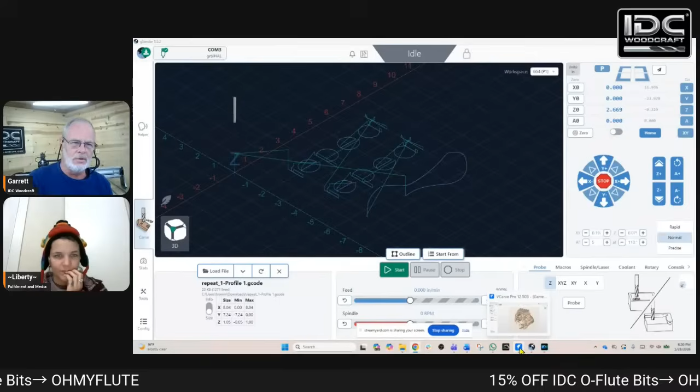Let's go over to this screen. It was kind of funny because Liberty, I saw the comment before the show, so I just launched Vectric and grabbed a 3D carve, and I happen to have this one. I didn't even know I had this 3D model. So I asked Julianne, do you want this? Do you want me to make it? Can you see how long this one's going to take?

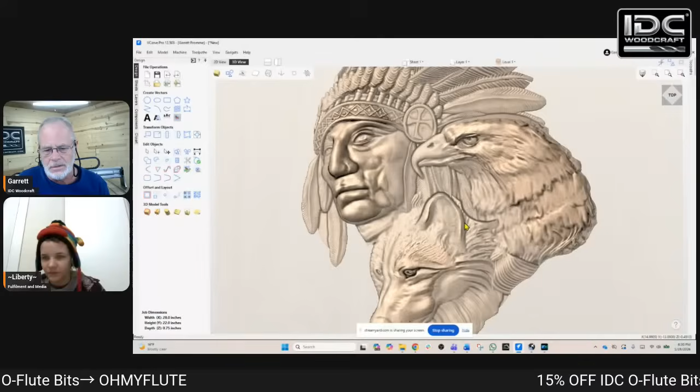This has so much detail in it that it's going to take a long time to carve, because there's so much up and down with the machine. It will never get up to full speed. So anyway, how would I put 3D text on it?

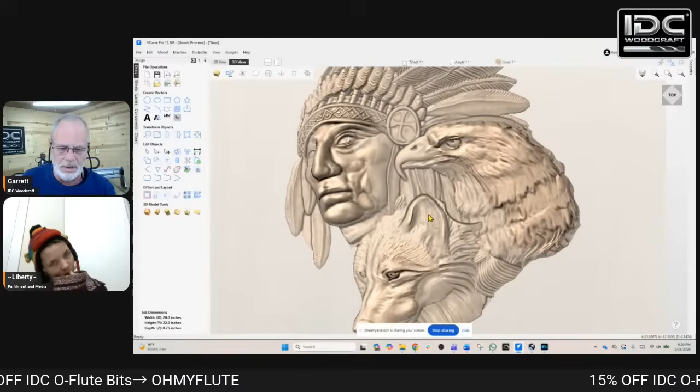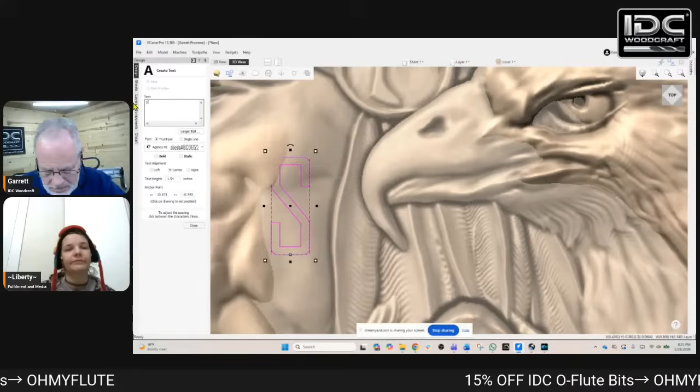It's actually pretty cool. So the first thing I'm going to do is create some text. Julianne said I should put the word spirit on it, spirit. And then I'm going to choose my text size, we'll go 1.5. And I spelled it wrong. Spirit, there we go. And then I'm going to change my font to something that's a little bit bigger. Okay, all right, so we have the word spirit, and I'm going to close that.

And I'm going to just move that, we'll put it right kind of under the eagle's head there. We're going to go over to toolpath. I've got to just quickly create the toolpath for the model.

And I got to make that model a bit thinner. I got to make my material a lot fatter. 1.5. Let's try that. Cancel, I didn't quite get everything set up properly yet. So I'm going to go to the next one, Liberty, and then I'll come back to this one.

All right, we can share my screen again. All right, so I just got to delete that toolpath and reset my toolpaths. Reset, okay, all right, so here we go. All right, so this was okay. This was a 3D model I generated from Easy Create.

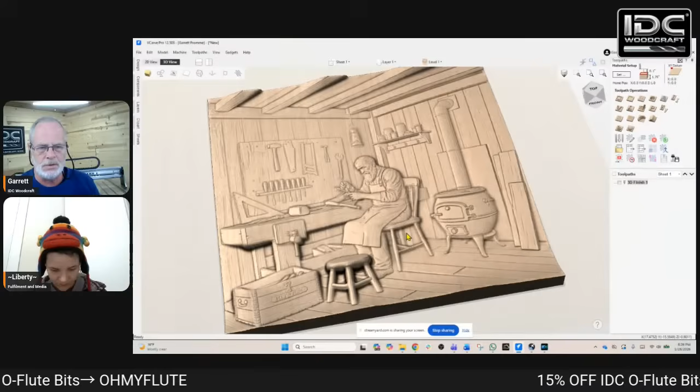So if you folks want to create 3D models but you don't know how to do it, Easy Create is a really, really super simple way to do it. And I did a video that shows you how to do it. Easy Create is a Vectric-based platform, so it only creates the 3D models for the Vectric software. But it's a really cool thing. I gave it verbal instructions, I put it into ChatGPT verbally, and then I copied the text that ChatGPT gave me to instruct it what I wanted, and I copied that over to Easy Create, because Easy Create doesn't have a verbal input.

You have to type it all in. I didn't feel like typing.

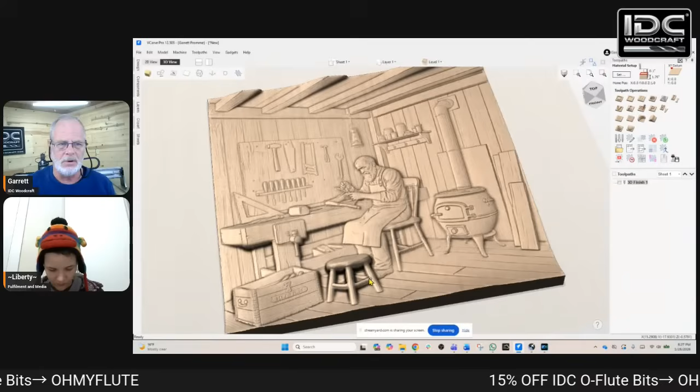So anyway, we have the word spirit on here, and I'm going to go to, I've already set up the toolpath to carve out the project. I'm going to just generate that carve real quick so you can see what we got.

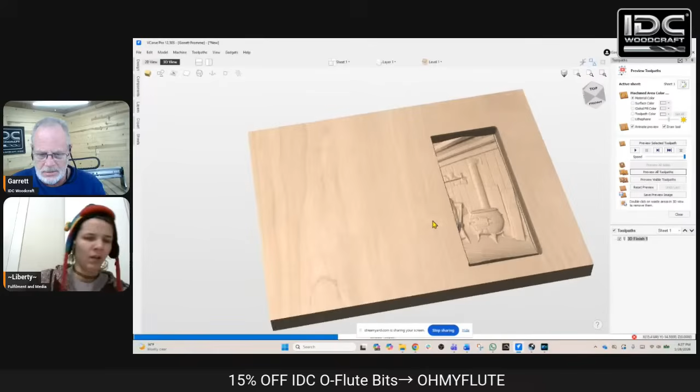And there it is. That Easy Create does, it's really cool, you can do quite a few different things on it. There's the carve of the woodworker in his shop, and he's got the potbelly stove there. So we're going to close that.

Now we're going to do a V-carve, and I'm going to the V-carve toolpath, and I'm selecting the text. And here's how you get the text to follow the profile of your 3D model.

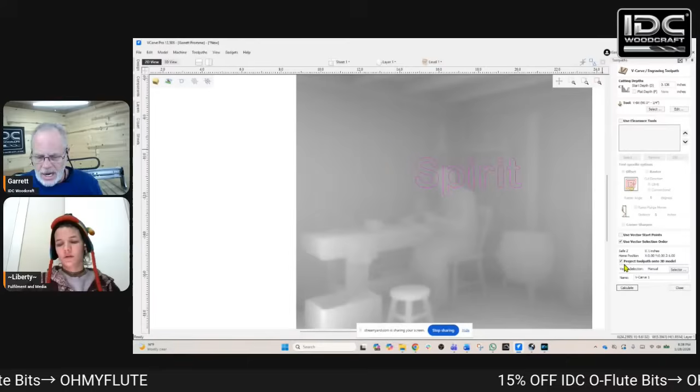While you're in the V-carve toolpath, down at the bottom, there's this little checkbox, and it says project toolpath onto 3D model. And with that checked, that will actually put that toolpath right on the 3D model.

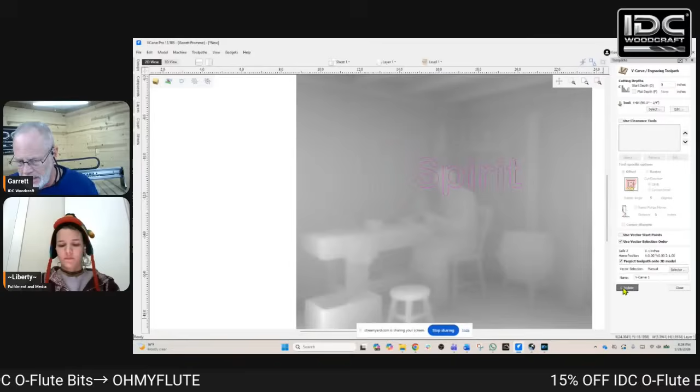So I just got to set my start depth to 0. That's the one thing you need to do. And then click calculate and preview the toolpath.

And there it is, and so it carved it right in there, and it followed the 3D model. So you can see it kind of slopes down and slopes back up. So if you have a 3D model, it's like a big arc, it'll project it onto that arc when you have that checked. All right, there we go.

All right, let's see. Back up to the top. We already did that one.

Okay, so I asked her what spindle she has. I've had that issue happen with me with the Makita router. So what I would do is first I would take the Scotch-Brite stuff, and I would clean everything off, your collet, the outside of your collet, and up on your spindle, and then try it again and see if it comes out. If not—

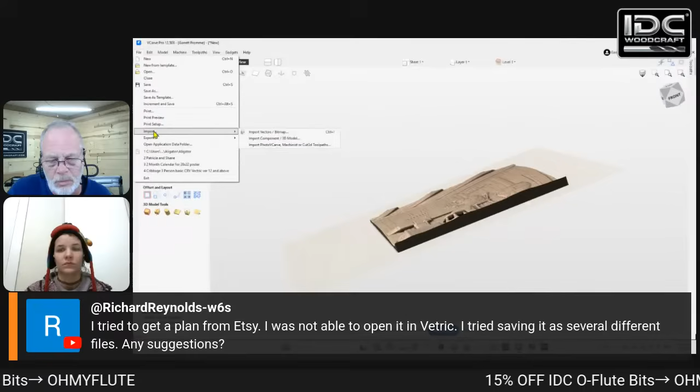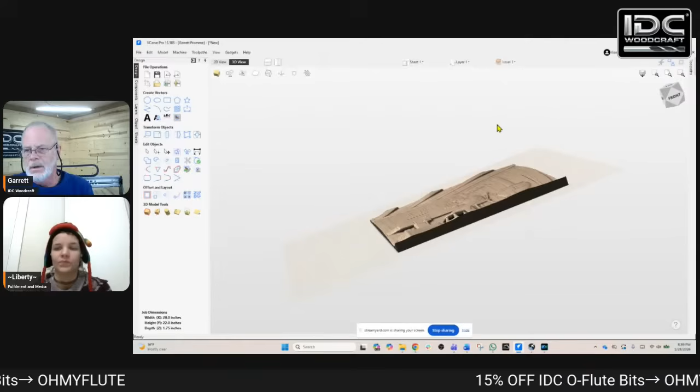For the import, up in the menus at the top, click File, then come down to Import, and you can import vector or bitmap. That's the one you'd use. Let's take a look - you want to look for an SVG file or a DXF file. So to recap: if the file was made in version 12 and you have version 11 in the Vectric software, you won't be able to open it. You can import a DXF or SVG if they provide it.

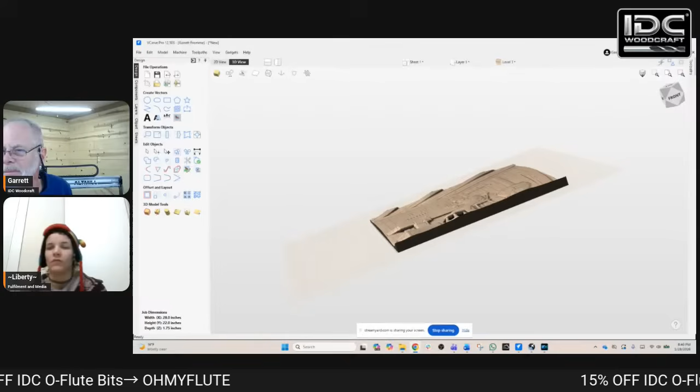Just received notice that my 1.5 kilowatt spindle for my long mill just shipped.

Yay! You're going to love having a spindle. Never go back, man. Any folks have a spindle - started off with the Makita router and switched over to spindle - put in the comments what your feeling was after you switched over. Will you ever go back to a Makita router? I can't go back to a router.

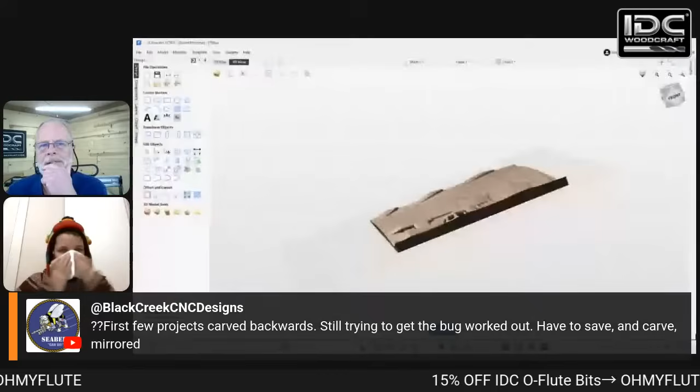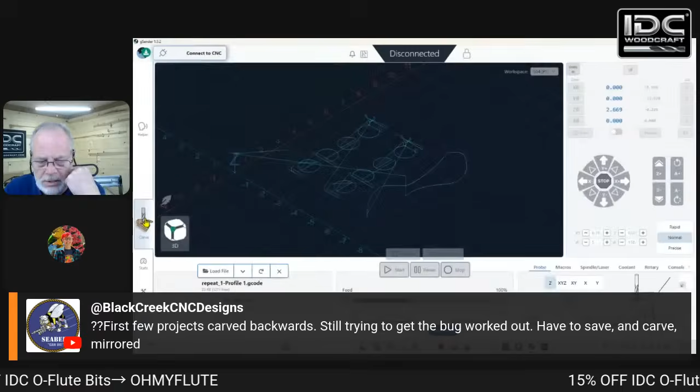Interesting. Yeah, I'm going to say on that one, I think I got an idea for you to check on. I'm going to share again and we're going to switch over to GSender. So regardless of the software you use, there should be a section where you can tell it to invert the motor direction for the particular axis. So if it's doing an X, you should be able to scroll through there and find it where it says motors, something, and switch the motor direction. So look for that, try that toggle, and then try a test run without a bit in it and see if it works. I think it's as easy as that kind of switch.

All right, Liberty is probably out having a coughing fit. I can hear her throat getting really scratchy. So let's see what we got.

Okay, come back, okay, so let's see. So Jared said, I'm new to learning. Oh okay, we already did that one, let me just get that one out, we're not clearing out some of the questions. So it's okay, I'm trying to make the number 29 cribbage board and can't get any array to follow the line. I made it in the center of the numbers, any solutions? Okay, we'll bring Liberty back on.

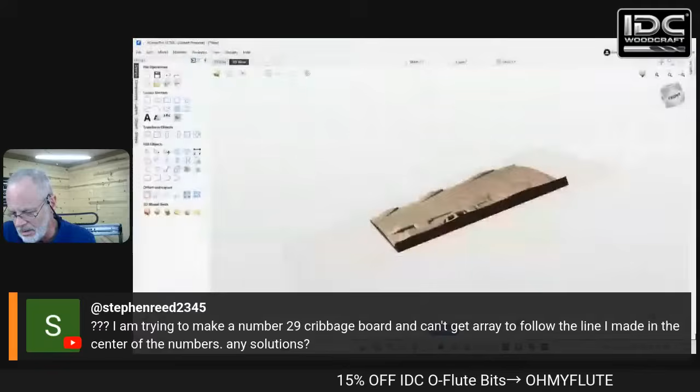You know what, I have not messed with that feature in a while. Liberty would probably be able to, she did that once. I haven't done it in quite a while, I would have to fiddle with it a little bit, but let's see what I can do right now. I'm going to just try to mess with it right now, see if I can remember how I do this.

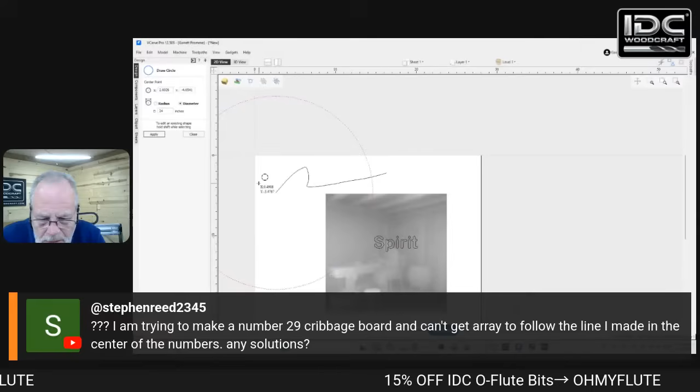So I'm going to just create a squiggly line just like that, and then we're going to put a little circle on the line. So let me get a circle, and we'll just put it right there. Nope, that was too big of a circle, way too big of a circle. Okay, we'll just do it like that then. Close, and we'll get rid of that circle.

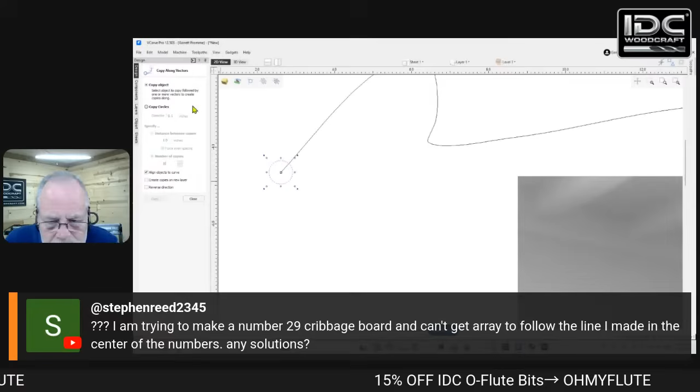And I want to array that circle. I'm going to actually shrink it down, and I want it to follow the line. So it's this fourth icon over, if I'm right. I haven't done this in so long. And copy circles, 10 copies. I'm just going to try to go with what I got. And oh, that's not what I wanted.

I'll have to play with this, but I think Kyle's got a video out that explains that. I don't want to take up a lot of time trying to figure it out here. I could, if I could mess with it for about 15 minutes, 10 to 15 minutes, I would get it.

The cribbage holes have to be a group first. So you have to make the 2 or 3, and then you have to group them so you can do the track on them. Do you remember how to do that with the cribbage, like the holes? The array? Yeah, it always takes me like playing around with it to get them where I want them. Like I always have to do it on the line, next to the line, just to kind of see where I want them.

Number 29, cribbage board, can't get the array to follow the line I made in the center of the numbers. I mean, if you're using... There, okay, I think I just got it. But yeah, it should be as far as center line if you're not following any sort of curve.

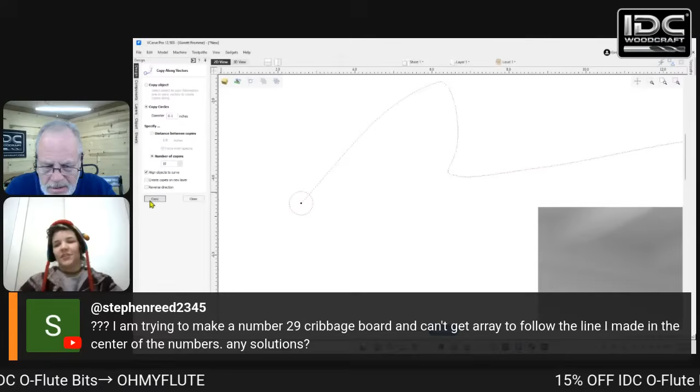Yeah, okay, select the thing. It's saying 10 circles. It's been so long since I've done it. Number of circles, number of copies. Now I'm going to hold the button down, shift down, and select the line, and I'm going to say copy. So look what it did, though. It made all these little circles there, and then it copied them along there.

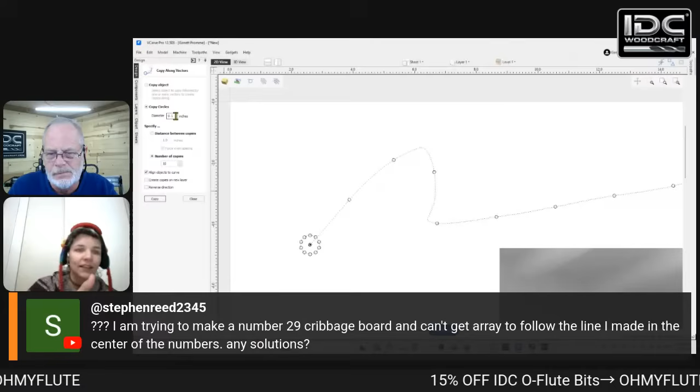I think, yeah, so you can set how far apart you want them, I believe. I can't see your screen because it's too little, but... Yeah, okay, it's not taking full size? The screen's not showing full size for you? Well, for me, because I'm viewing it on StreamYard, it's really itty bitty. I can't zoom in enough to see it.

All right, there's a distance, says 0.1. So let's try that. We'll Control Z, and there we go. Okay, it was the first selection, copy object, and then how many copies I want, and align to the curve. Boy, it's so small for me too. Anyway, I could take up another half an hour just trying to figure this out, so I'm not going to do it here.

I think, like I said, if we find it, Joanne will post it, the video that Kyle has on that, because I know Kyle made a video on it.

All right, so Albert said halfway through the job, the program would stop. Error would say speed was not set. Hit the continue button, which it would, but at a slower default speed. This would happen several times for no reason.

When that happens, it's almost like it loses it. So when the G code is reading, and it comes across the F, which is setting the feed speed, that becomes a mode. It gets locked in until there's another F speed called in. So the only thing I can figure on that is something in your code is disengaging that, like resetting it. I've never seen that happen before, but something in the G code may be resetting that to nothing.

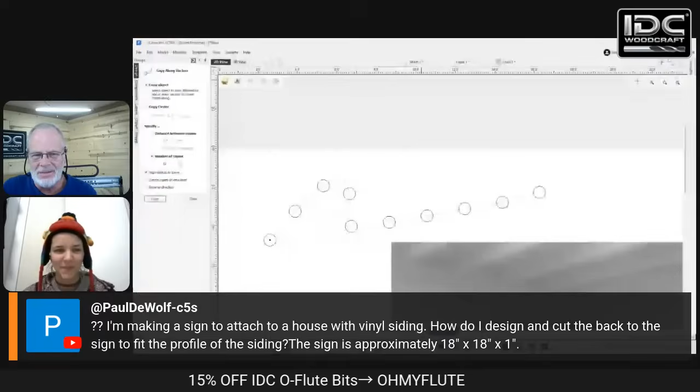I'd say probably a molding toolpath. Yep, you got it. So molding toolpath—I'm going to try to do this for you real quick. We're not going to run through the full process of how to do a molding toolpath because that can take a little bit of time, but let's just say...

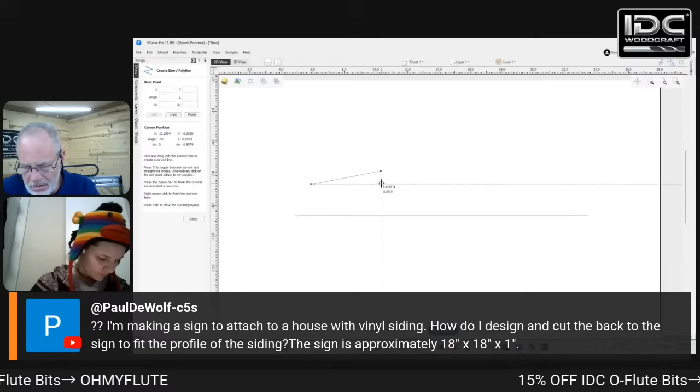I've got to think about this. So we'll just make that line—that will be the back of the siding—and then I'm going to try to create just a general siding profile here. Okay, so there's three of them. I'm going to go over to here.

I'm going to go to the molding toolpath. So it is... okay, there it is right there. If you have Vectric V-Carve, it's going to be the third row down, the icon. Cut 2D will not do it.

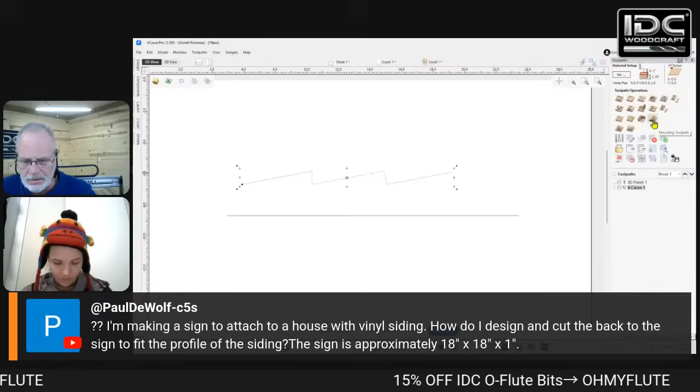I'm going to select that. I've selected the profile there, and now I'm going to select the line and see what it does. Okay, I think I did it the other way—I'd have to play around with that, but yeah, molding toolpath is what's going to make it happen.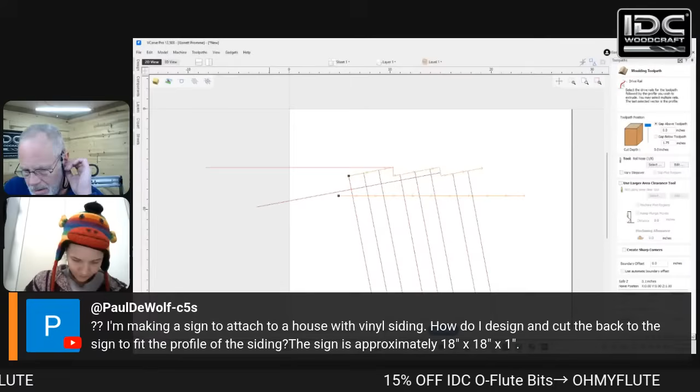Why is it going so far? That's what I don't get. That'll happen if you play with the molding toolpath too much. Liberty's totally on it—there's a molding toolpath.

I think Mark has a video on molding toolpath, so we'll see if we can find that and link it here.

Okay, yeah, Ellen's checking out. Good night, Ellen. Good night, Ellen. All right.

Are your O-flutes for acrylic only? They will work on acrylic, they'll work on HDPE, any plastic they'll work on. I've used them on foam too. Have you used them on foam? Okay. They're not designed for aluminum though—our O-flutes are not designed for aluminum.

Correct, I love cutting HDPE, it cuts so nice. Remember how fast this thing cuts? It's smooth, just like butter, and the cut is so clean. Yeah.

There we go. All right—I used a notebook to run my CNC Shark HD10, or a netbook, and then I added the fourth axis. I could not get the enable button. Next Wave could not figure it out. I figured it out—I had to hide the taskbar to get the enable button.